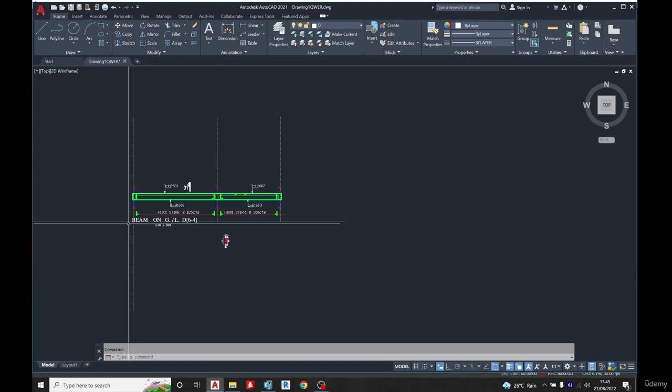So welcome back, guys. In this video we are going to be detailing the beams, and let's see how it is. So this is beam on grid line D6 to 4, which is this beam. So we can see it now.

At the top here I need 1379, and also at this top here I need 1086. So what I can do, for more practical sense, is I can just take this reinforcement on top and extend it towards this side. Then for the bottom I need 745, and this place I need nominal reinforcement. So look at how I detailed it.

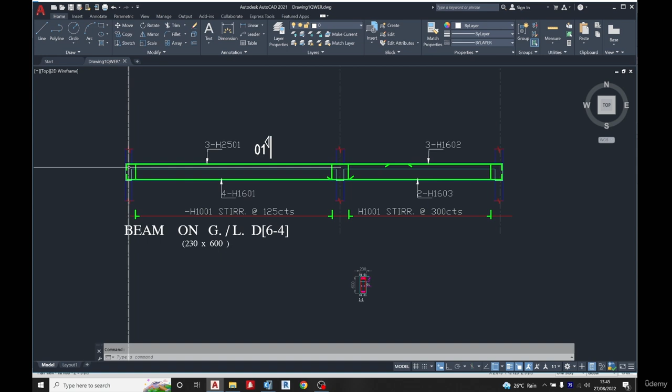Now in this place, I know I need 3H25, so I'm sending my reinforcement inside. Then at the bottom I need 4H16, so this place I need 2H16, and this place on top I need 2H16 because it's nominal reinforcement here. So you can see the way I'm sending, and you see the way I'm lapping my reinforcement.

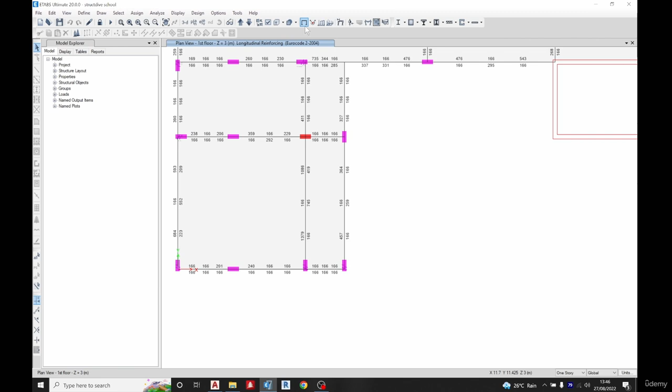Okay, so let's look at the bending moment diagram. So bringing out the bending moment diagram, you come here, select this, choose the combo you want, factored combo, and I'm choosing maximum only. Apply, click OK. Now you can see it.

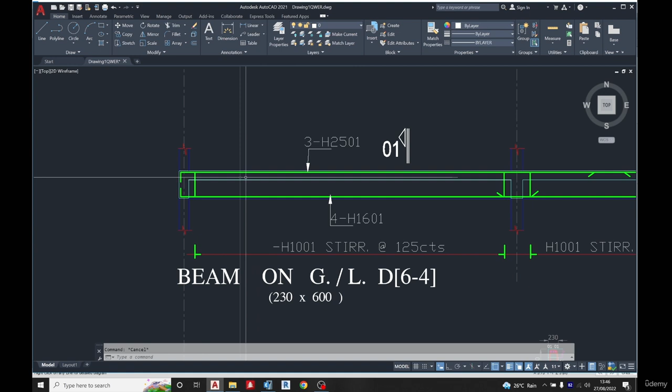For this top reinforcement, I can only lap it somewhere around this place, the place of contraflexure. That's where I can terminate it. So I can decide to stop my 3H25 somewhere around here. Now to get that length, all you need to do is select the beam, right click on it, and it brings it to you. So what you do is just move the beam to wherever you want. So if I move the beam here, I can look at this point and see the distance.

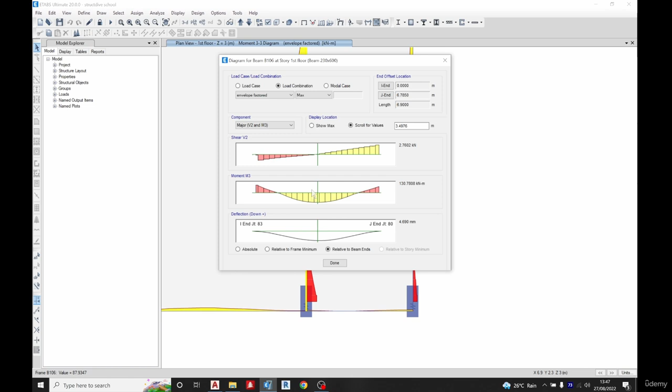So what I just do now is, for my top reinforcement, I'll select it and lap it a little bit inward to my bending moment, because if I lap it here, there's still chances of failure. So I'll lap it a little bit into it. But for my bottom reinforcement, I have to lap it somewhere where there's low bending moment, so somewhere around here. So I'll start my bottom here and end it somewhere here. I can't just lap at the middle point because there's moment at that point and it's dangerous to what we are doing.

So looking at my top reinforcement now, the 3H25, I can decide to lap it somewhere here and start another 3H25 here again and lap it somewhere here, and continue with my 2H16 top and bottom. And this one too, for the bottom I'm going to provide 4H16, so if I'm to provide my 4H16, I'll lap it close to the support and close to this.

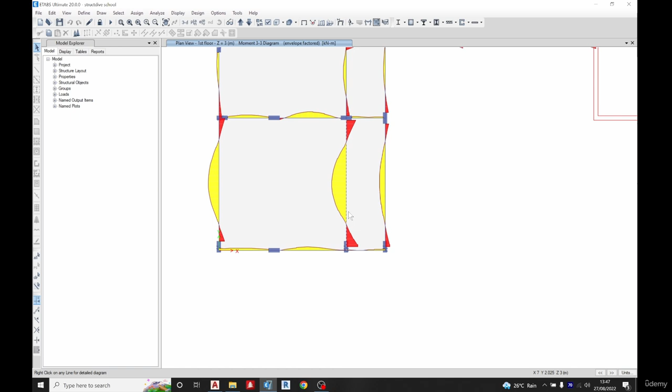So there's a rule that says for the top bar you lap it at the midpoint, while for the bottom bar you lap it at the support. So let's see my detailing. You can see it. For my top bar now, I lap it close to the midpoint, while for my bottom bar I lapped it close to the support.

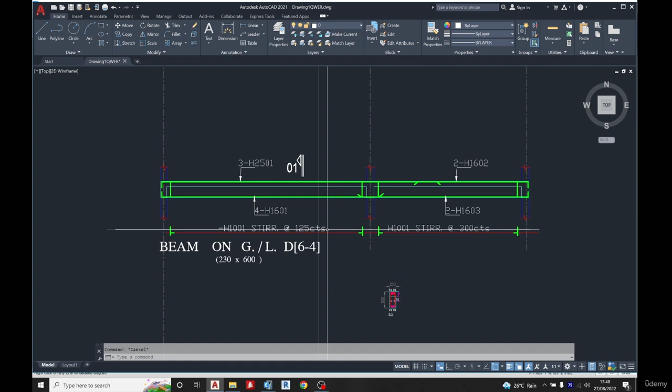So my stirrup now, I'm using H10 at 125 center to center, like I've explained on how to calculate this. Then this other side I'm using H10 at 300 center to center. Okay, so we are done with that.